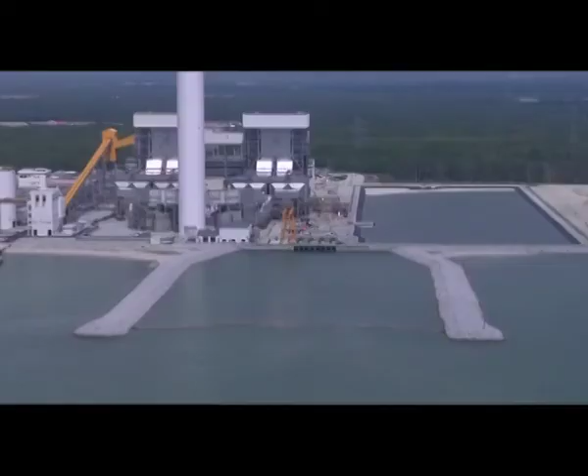Nestled amongst this natural wonder is a nature-friendly coal-fired power plant. The Jimah Energy Ventures power plant was constructed on a reclaimed island in an effort to preserve and revitalize the 200 acres of mangrove-filled coast.

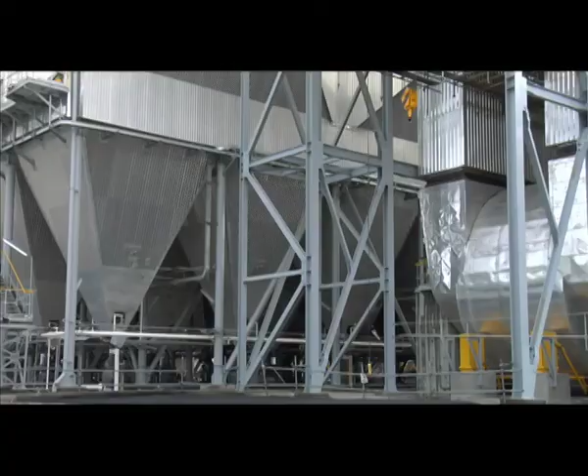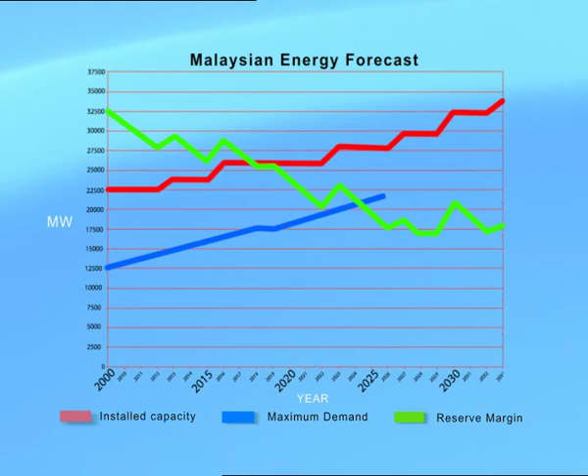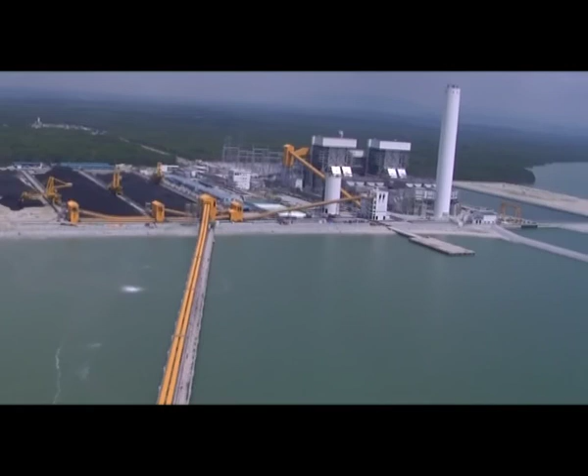In meeting the nation's electricity demand growth and fuel diversification policy, Jimah Energy Ventures, or JEV, is entrusted by the Government of Malaysia to develop a 2 by 700 megawatt coal-fired power plant located near the load center, Klang Valley. The site selection was subjected to serious study, due to requirements such as availability for all-year-long coal shipment and abundant water supply for its cooling system, and the Jimah site was selected.

Having built the plant on reclaimed land minimizes the impact to its surrounding mangrove forest.

Environmental impact studies were conducted, with consideration of all possible outcomes that the power plant would have on the surrounding area. In effort to ensure that the power plant's existence is not detrimental to the environment, JEV's commitment to preserving the environment begins with a detailed environmental impact assessment study, which was approved by the Department of Environment and its panel of socio- and environmental experts on 31st January 2005.

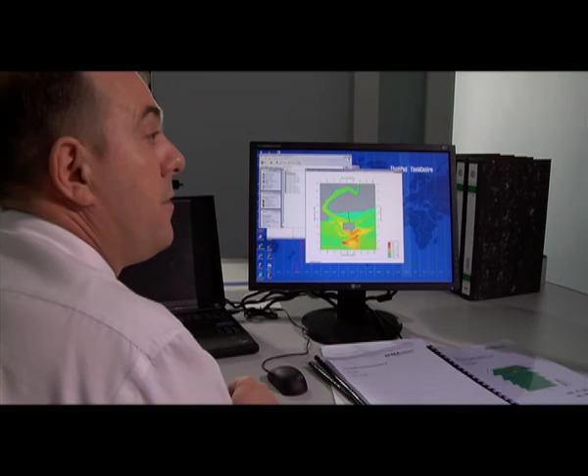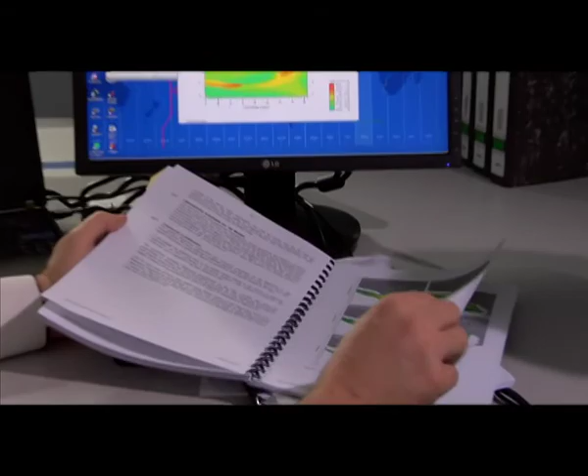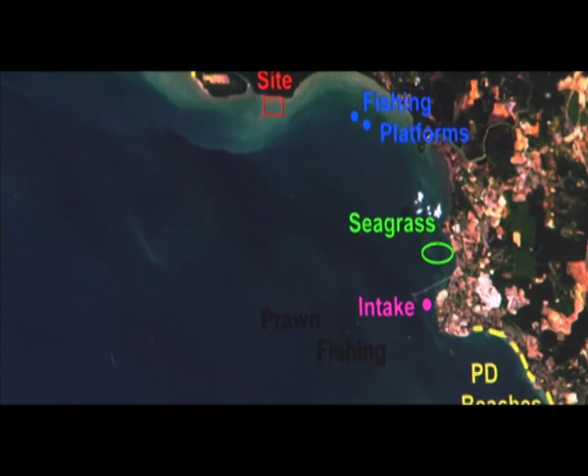Hydraulic studies were conducted to determine the possible changes that may occur in water activity. By using 3D modeling, over 17 simulations were done to cater for possible configurations, which took more than 3 months to generate. The thermal plume simulations were observed to identify the power plant's footing, seawater intake, and outfall locations, to minimize changes in water temperature, wave activity, and future impact on sedimentation.

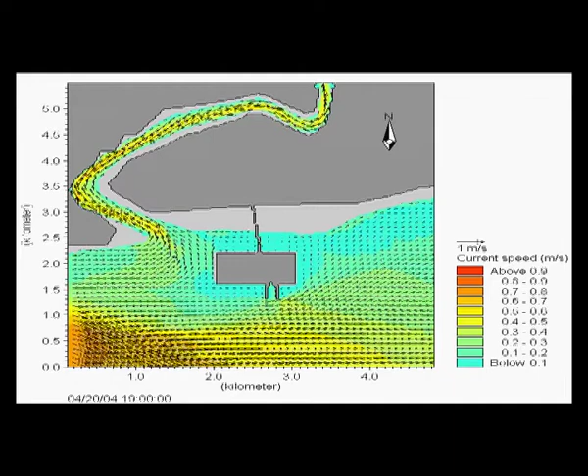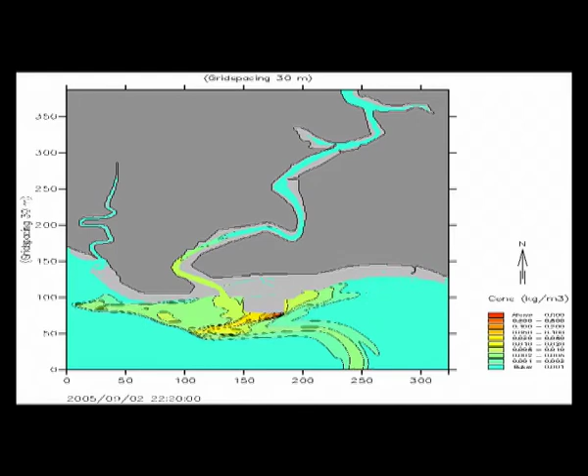The modeling results are divided into 5 different sections: hydrodynamic model, study of movement of suspended sediments, wave modeling, advection dispersion modeling, and erosion and accretion. The model identifies relevant impacts such as coastal erosion, dispersion of suspended sediments, and the dispersion of thermal plumes. The outcome of the study plays a significant reference to the design of the plant.

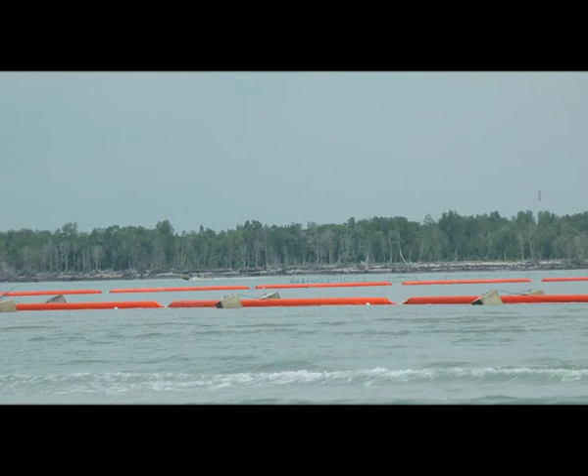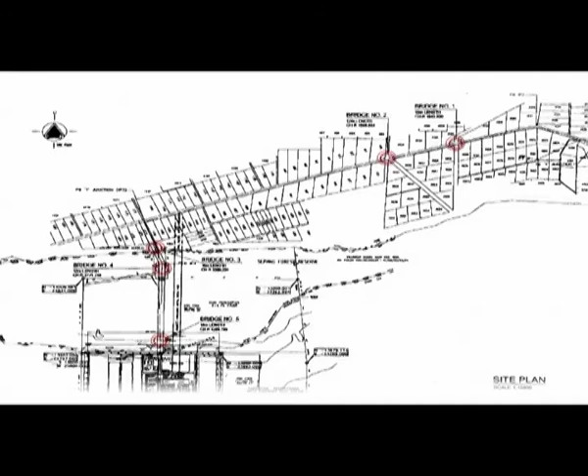From the simulated impacts, JEV can plan mitigation measures. The most crucial mitigation measure taken is to maintain the natural circulation of the mangrove swamp. 5 bridges were built along the access roads leading to the power plant to maintain the natural water paths to the mangrove forest, preserving its habitat.

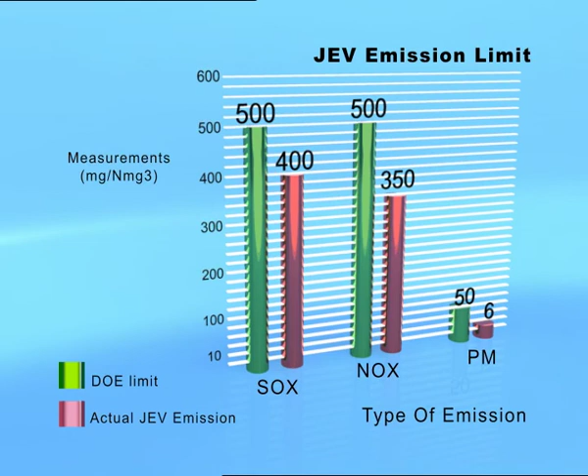Emission studies were conducted and a full evaluation was carried out to identify potential impacts. The use of electrostatic precipitator (ESP), flue gas desulfurization (FGD), and low NOx burner allows JEV to meet the sulfur oxides, nitrogen oxides, and particulate matter standard limits drawn by the Malaysian Department of Environment.

The 2006 statistic by DOE confirms that the carbon monoxide produced by all power plants represents 1% of overall carbon monoxide emissions produced in Malaysia. 98% is contributed from the transportation sector.

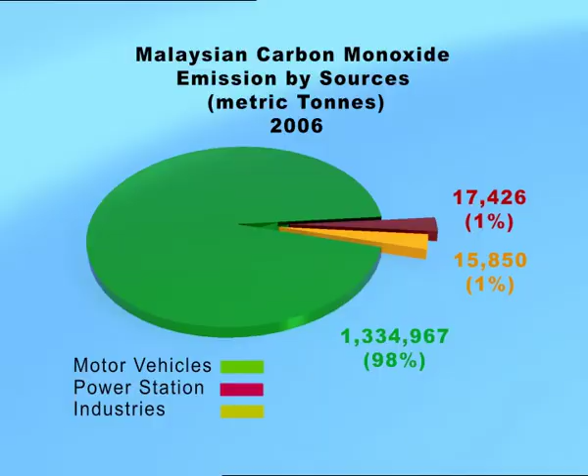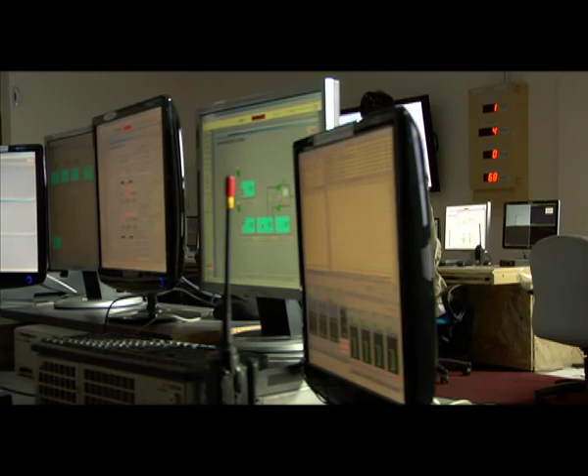JEV operates a productive and nature-friendly coal-fired power plant, using natural resources to operate, and carries out its environmental management plan for scheduled monitoring of the power plant's environmental impacts during construction and operational phases, ensuring that all the elements released back to nature do not harm the surrounding area or affect the communities nearby.

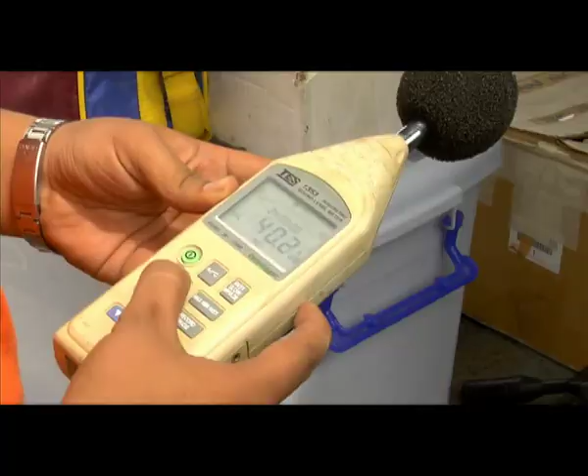Noise levels are monitored in various locations around the power plant to ensure that the noise produced remains within an allowable limit.

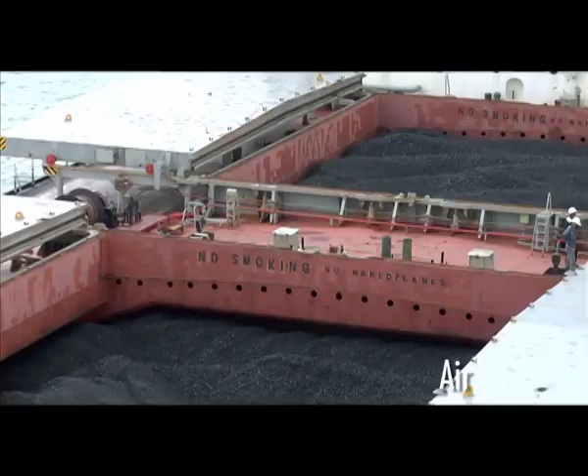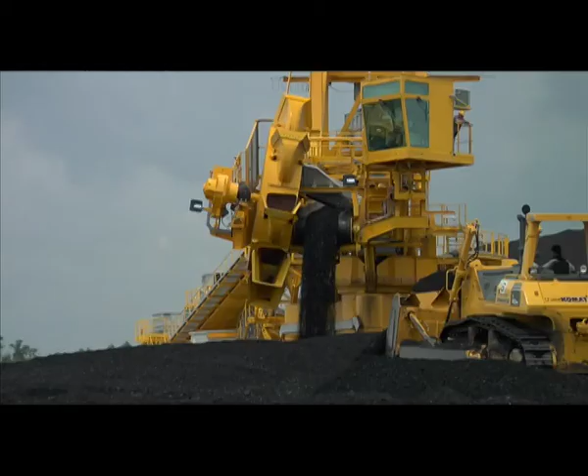Measures have been taken to minimize changes to the air quality at the coal handling facilities by having a covered coal conveyor for transporting the coal from the jetty to the coal yard, and also installing a dust suppression system to prevent coal dust from escaping into the air, in addition to regular cleaning at the coal handling facilities.

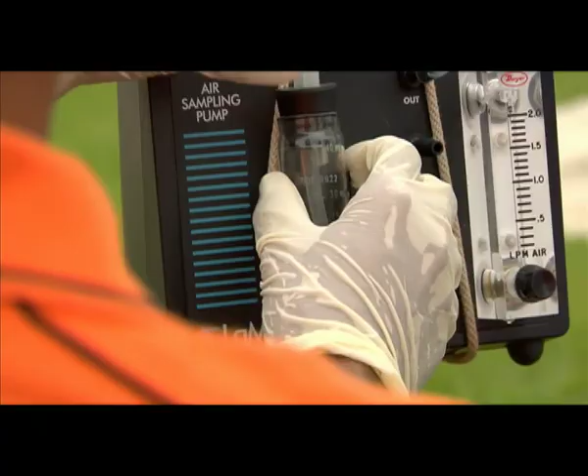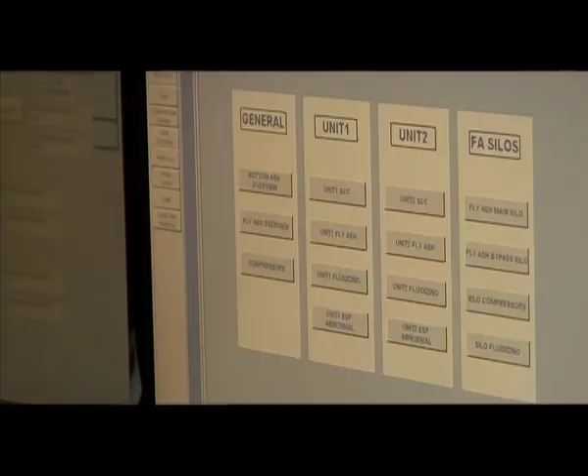Air quality samples are taken regularly in and around the power plant by JEV to monitor the level of air quality. In addition, an online monitoring of flue gas emission is linked directly to the Department of Environment.

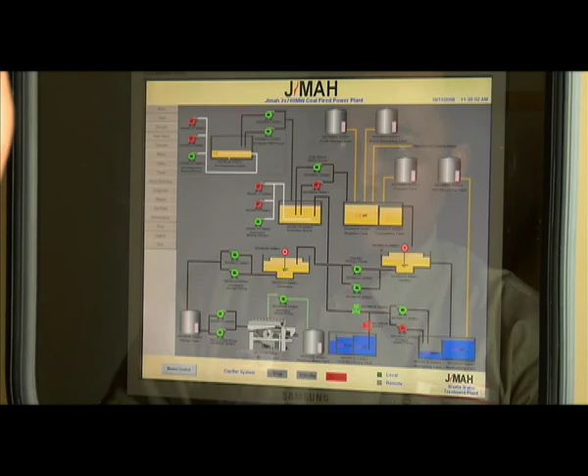The pH level of the water used during the power plant operations is monitored and attuned accordingly before being discharged into the sea.

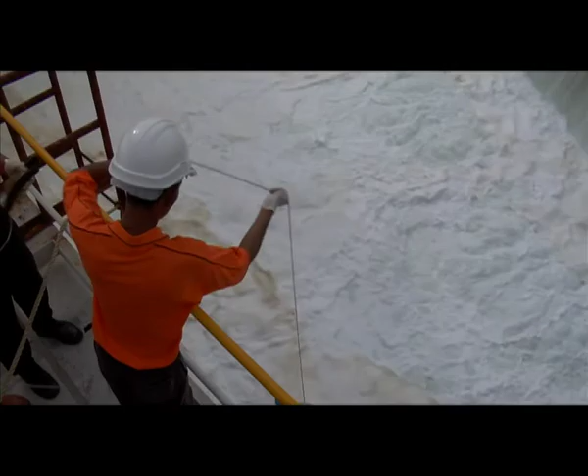Seawater used in the power plant's cooling system and flue gas emission filtering process is treated, and JEV monitors the water quality and the potential impacts resulting from warm water discharged back into the sea.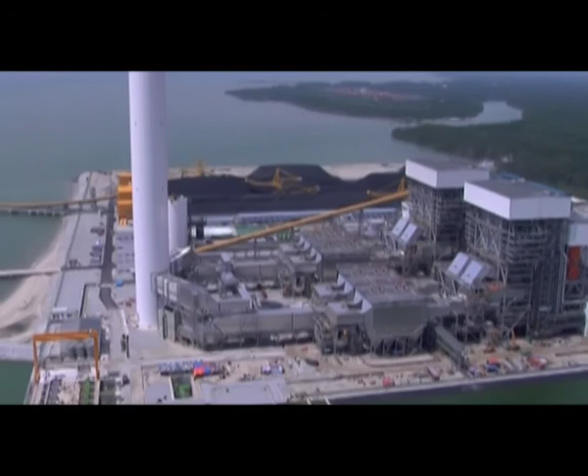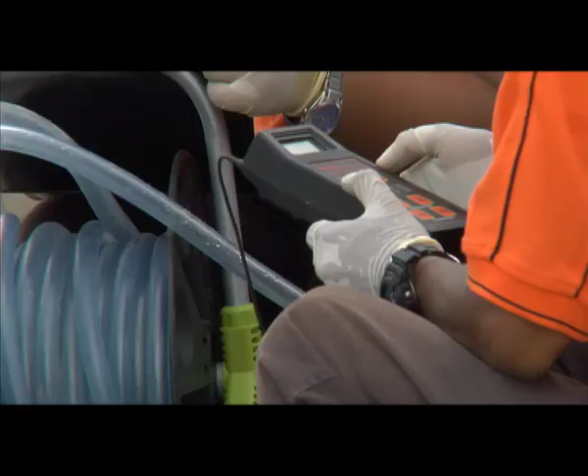Ash, the byproduct of the coal combustion process, is kept in a pond lined with impermeable geotextile material to prevent the ash from seeping into the soil beneath. Underground water samples are also checked regularly.

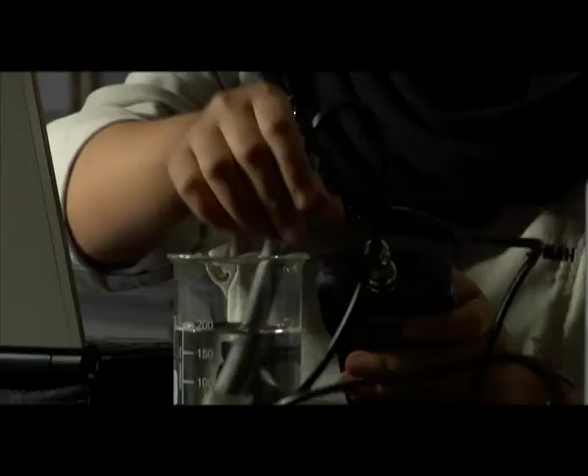All samples taken to the laboratory are analyzed by qualified technicians, and reports are submitted to the relevant government agencies. Waste produced is regularly transported to the disposal area by Kualiti Alam in the most clean and secure way to maintain and protect environmental quality.

Mangroves have complex and remarkable root systems that resist soil erosion by helping to bind the shore together. To improve the current condition of the surrounding mangrove forest, mangrove replanting activities are being carried out by JEV in accordance with experts' recommendations in the mangrove growth studies.

Approximately 20,000 trees have been replanted, in collaboration with relevant government agencies, as part of a successful mangrove replanting exercise.

Through all the environmental management plans, the power plant is infused with nature and its elements. As a friend of nature, the best elements of Jimah have given JEV the natural resources required for the power plant.

JEV will continue to play its part in respecting and coexisting with nature and the communities around it, by preserving and protecting sustainable development. Jimah Energy Ventures is committed to managing the environmental concerns related to the project implementation, and to preserving a living environment for the surrounding community.